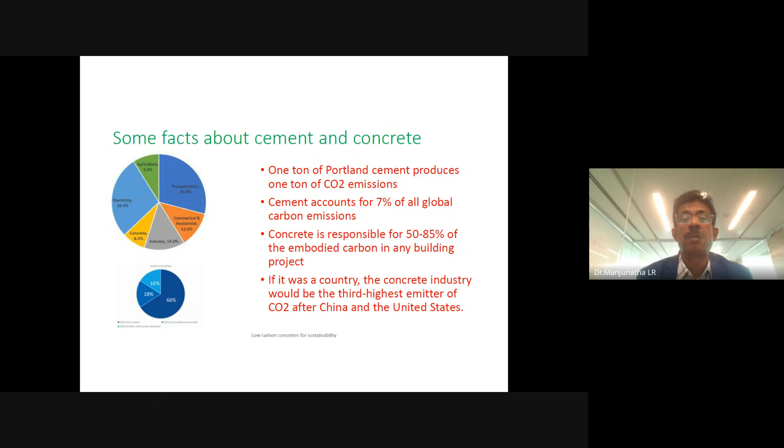There are many ways actually. You can adopt blended cements like slag cement, whose carbon intensity is very low. You can use PPC cement, Portland Pozzolana cement, which is widely available. If you're doing small construction, you should never use OPC cement. If you are using OPC cement in RMC batching plants, you can blend it with fly ash, GGBS, or use high-grade concretes blended with micro-fine materials. These are the various means of reducing the carbon footprint in construction.

So I've already discussed these points. What is low carbon concrete? Earlier, when somebody used fly ash, people used to say, 'oh, you are adding ash to the concrete.' I still remember, when I was at RMC Readymix India, if you mentioned fly ash, they would say, 'what, you are adding ash? We want pure OPC 53 grade cement concrete, we don't want any ash, you are deteriorating the quality of concrete.' That was the kind of questions being asked. But now those concretes are well adopted and accepted throughout the world.

They are called low carbon concrete, but without affecting strength, durability, or performance - in fact with better strength, better durability, better sustainability, and reduced life cycle cost. These are the new terminologies being adopted for low carbon concretes. They are safe, highly durable, and economical in terms of cost benefit. When we look at ESG values, we look at how it is cost effective, how durable, how sustainable, and how you can reduce the life cycle cost. These are the various aspects we look into.

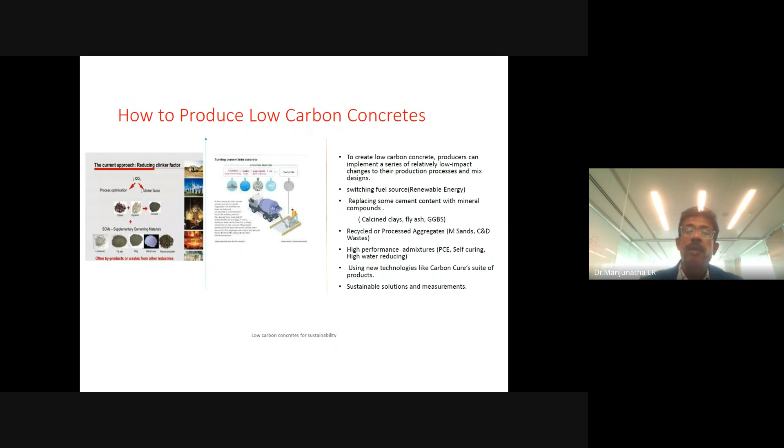Then there are carbon cure technologies by injecting carbon dioxide in the fresh state of concrete. Here you're converting calcium oxide to calcium carbonate, which is a solid material. These are various solutions we are getting in low carbon concrete.

So how is low carbon concrete globally taking shape, and how is it affecting things? Being in Vizag or some other city, you may find that this kind of intensity or measurement of low carbon concretes is not there.

But globally now, go to European countries, America - they will mention the World Trade Center, brought down by terrorists, and a new tower has come near the World Trade Center. There they specified for the business center that you have to design M80 grade concrete, but your cement content should not exceed 230 kgs per cubic meter, whatever you want to do. Those were the specifications for that tower.

So the companies which designed that went for a GGBS fly ash mix along with a microsilica content, where they could get that M80 strength and build the structures. Now those kinds of systematic regulations are coming where the demand is very high, the grade of concrete is very high, but you cannot use higher cement content, because they want to bring down the emissions in the concrete.

So when we make concrete, there are two considerations - one is the supplier consideration, the other is buyer considerations. The concrete companies like RMC or anybody making concrete, they want better pricing and adaptability, and a good supply chain system.

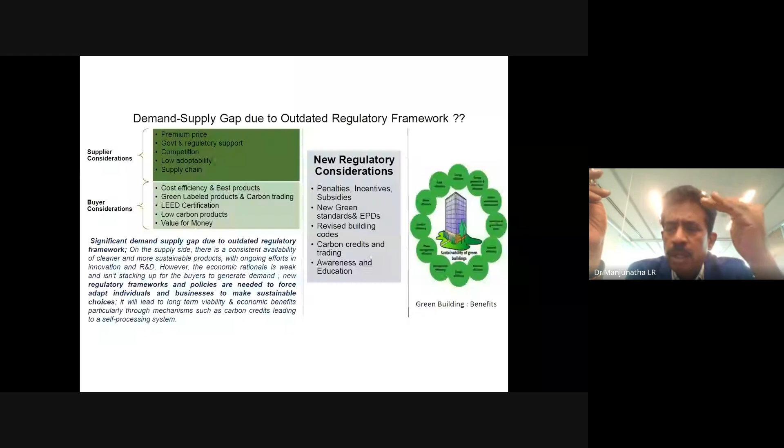These are the various factors. So government is playing a very important role now. Standards are coming, National Building Code is coming, then we have new IS 456, new IS 383, where I'm part of the committee. They're all changing now - IS 383 is now adopting a higher percentage of C&D waste and recycled aggregates usage. All the codes now are allowing the usage of cementitious material.

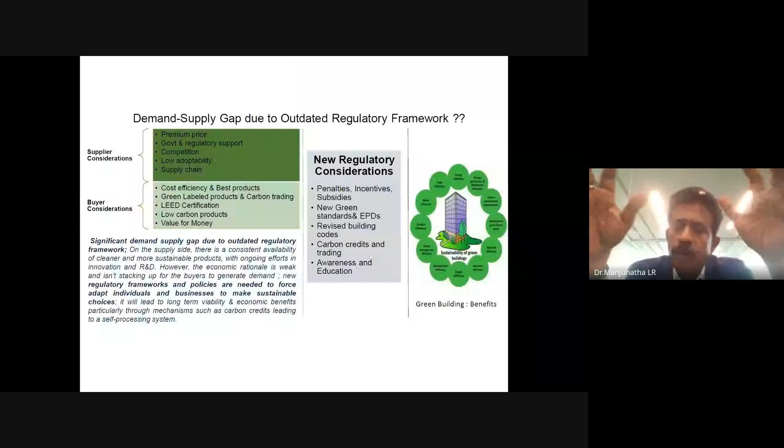New IS 456 is allowing composite cement, blended cements, and other types of cement. Many types of cement which have low carbon intensity are being allowed to be used in concrete making. So we need to work very closely.

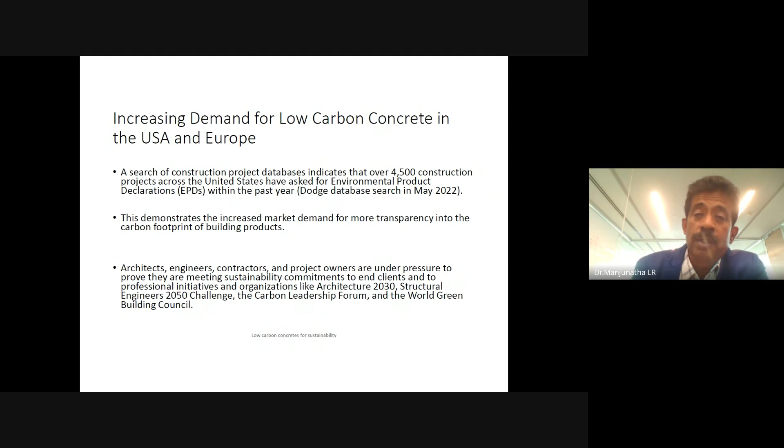So there's an increased demand for low carbon concrete. As I told you, if you are saving 1 ton of carbon dioxide in concrete making in Europe, you are being provided $100, 100 euro as an incentive. That means almost 9,000 rupees is the incentive for you if you go with low carbon concrete.

Coming to JSW Group, we are one of the largest steel producers in the country with huge steel capacity, and our cement company is the fastest growing cement company in India. Currently we have 21.6 million tons capacity, and we are going to reach 40.9 million tons by 2030 - that is our goal for higher growth.

So we have paints - recently we have acquired AkzoNobel India to become the third largest paint company. Then we have infrastructure - we have ports near Paradeep, and we are building a new port in Paradeep.

Then we have ports in Mumbai, Jaigarh, and other places. So our port capacity is also increasing. Sports, we have many sports ventures. We have Delhi Capitals co-owners, Haryana Steelers, Bangalore Football Club, and also through Inspire Institute of Sports, we are supporting the development of new champions for the Olympics. These are the various verticals of JSW Group.

Recently, we have entered into JSW Motors also, where we are the joint partners with MG Motor. We have launched a new vehicle, Windsor, with battery as a service. No other company has that kind of a new system where you don't have to own the battery in the electric vehicle. It's owned by the company.

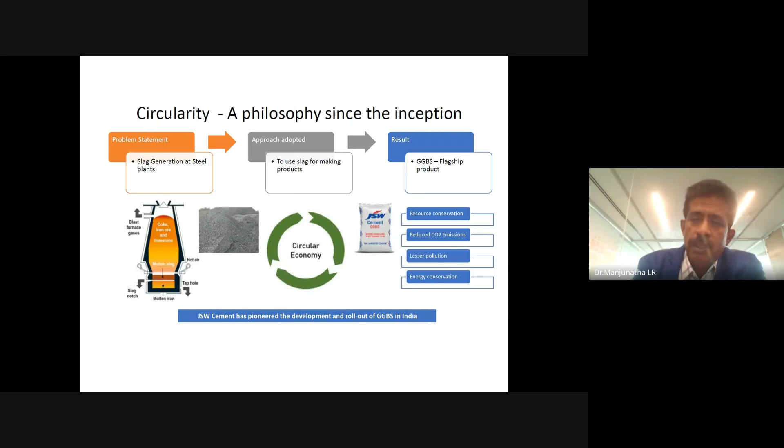So our main mantra is to adopt a philosophy of aligned growth using circularity: reduce the waste, reuse the waste and byproducts, recycle the byproducts, and always think of new innovative ideas, new products. So circularity is our philosophy. As I told you, we are adopting many green initiatives to develop new world-class products using technology, using innovation. Those products are global benchmarks, which can be adopted to develop low carbon concretes in India to make the world green.

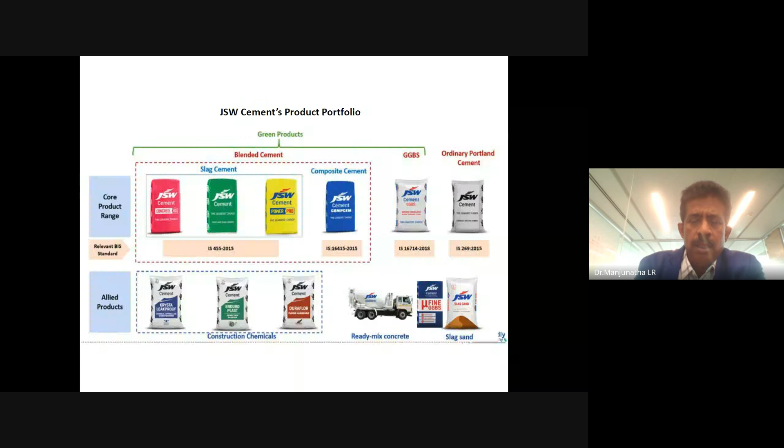This is the product portfolio. You can see, even though we make OPC cement 43 and 53 grade to give all the materials to the customers, 85% of our product portfolio is completely green and sustainable. We are the largest producer of slag cement in the country. We make composite cements, we make blended cements. Also, we make ready-mix concrete, low carbon concrete. And our flagship products are GGBS and microfine GGBS. Both are adopted almost everywhere in India.

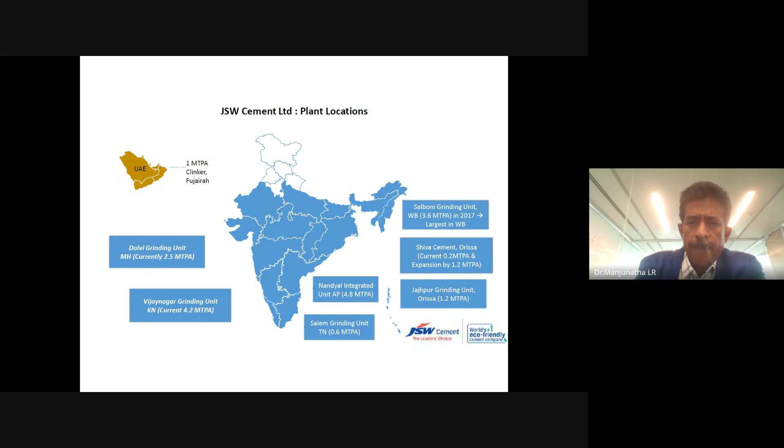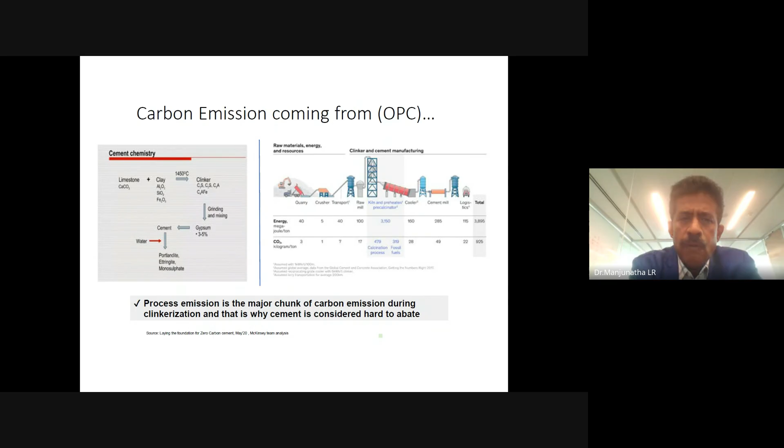So carbon emissions, as I explained earlier, to make 1 ton of clinker, there are almost 925 kg of CO2 emissions. Energy consumption of close to 3,895 megajoules per ton. This is the energy requirement because the limestone goes through a process. First, we bring the limestone, we mix other additives, clay, alumina, silica, iron oxide, and have a raw meal, grind it, heat it up to 1450 degrees centigrade with preheaters through the kiln. Then we get clinker, grind the clinker, add gypsum, and we make cement. So that's how the cement cycle works.

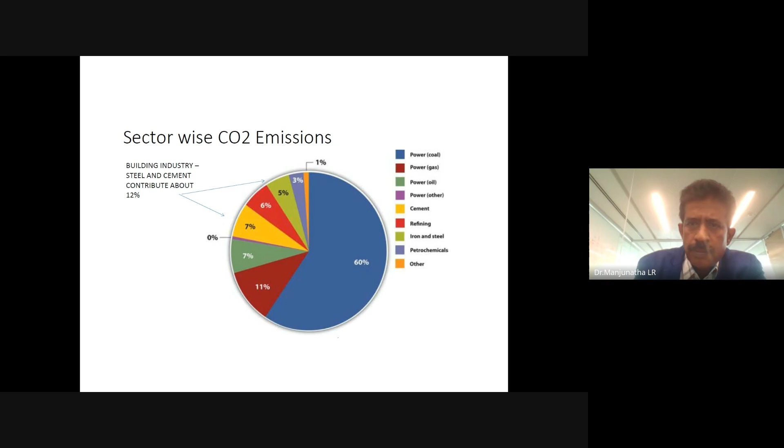So coming to the construction industry, as I told you, the energy consumption from building construction, operation and maintenance is about 40%. So once we construct the building, it's not over. We have to maintain, operate, AC systems are required. And many buildings and campuses now have various maintenance systems, HVAC, everything is required. So emissions are about 30%, and global dust. Construction not only leads to emissions but also dust, the particulates, PM 2.5, PM 10. These are all worst disasters.

When winter time comes, we always struggle. The air quality index in many cities has now deteriorated completely. Almost 150 to 200 air quality index is coming. Because of that, people are not able to breathe properly. These are the various aspects during the winter season. So we need to really think why it is happening like this. A city like Delhi closes schools for almost 10-15 days because the air quality index is poor.

And we need development, we need growth. India is one of the fastest growing economies in the world; we're going to be the third highest economy very soon, overtaking Germany or Japan. When it happens, we need development, we need growth, but at the same time, we have to keep our environmental conditions safe so that our next generation will be very comfortable living on this planet.

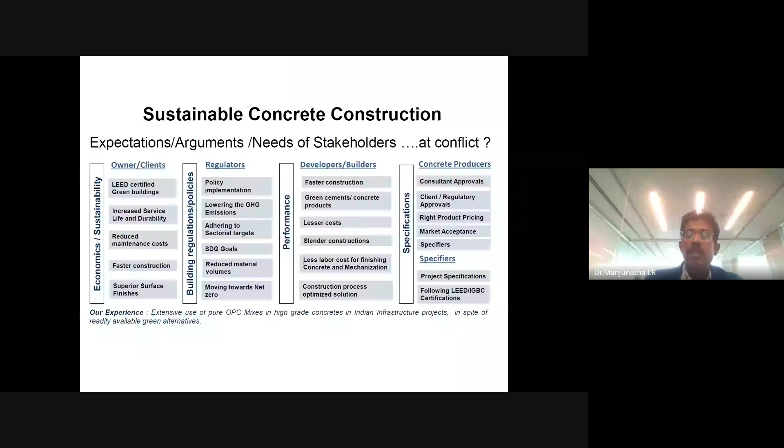So concrete producers, RMC companies, they want the approvals of the client, right product pricing, because they should be sustainable. They should be able to provide a good quality product at the right price. And market acceptance is also very important. Then there are structural consultants and professors. Many projects may be coming to your college for approvals on mix design and other things. So you also evaluate based on the specific requirement of the client.

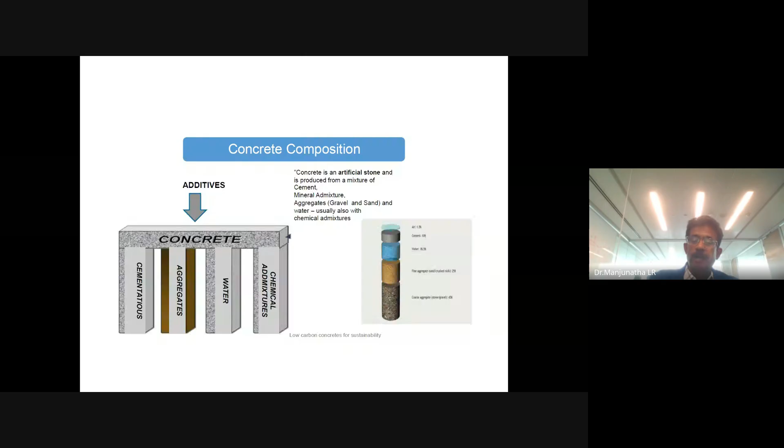So coming to the concrete composition, as I told you earlier, concrete was a mixture of only 4 to 5 ingredients. Mainly it was cement, aggregate, water, admixtures. But now the concrete philosophy is changing, as I told you. In the new IS 456 draft code, on the exposure condition itself, they have now got various classes. To understand, to educate the people is very important. So we need to really work on how we can take it forward.

So it clearly says that the adoption of sustainable SCMs like fly ash, GGBS, slag cement, PPC is always there in the code, and you can adopt them very comfortably. Many clients or other people will keep on telling, no, I want only pure OPC cement concrete, I don't want any blending. But we have to teach them. We have to make them listen. See, we are giving you the same quality, better performance, better durability, at a bit reduced cost. So why should you not accept this new type of concrete with a blended cement or an SCM instead of going for a pure OPC concrete?

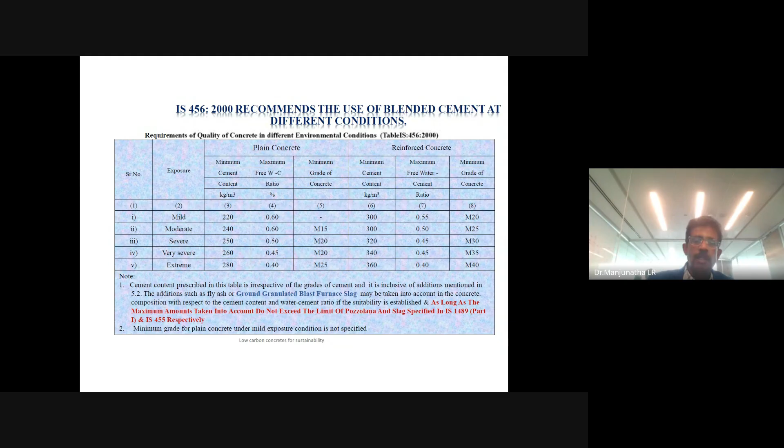So when you are becoming a designer or a consultant, or you want to teach the students, you have to basically make them understand what is important, what is the need of the hour for the country, for the concrete technology. That's very important. And we need to provide proper solutions and make them realize. It may be one call, two calls, three calls, whatever the number of calls, we can convert them.

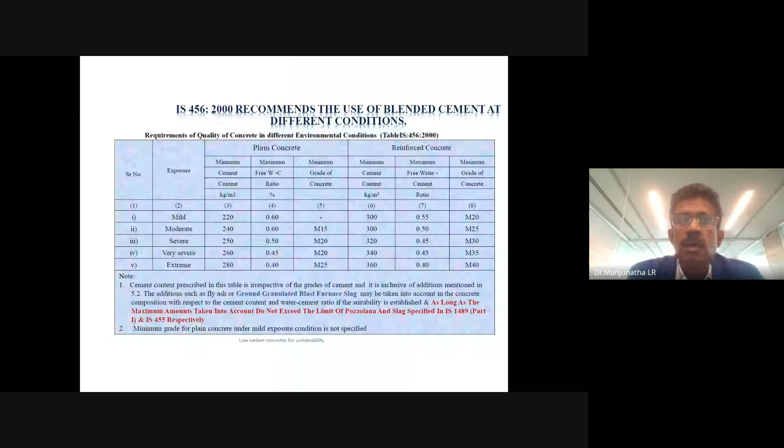So meanwhile, durability parameters are coming, sulfate and chloride resistance based on the environmental conditions. We need to really work very closely on what kind of cement and what kind of blended mix of OPC, GGBS or fly ash will be effective based on the sulfate resistance and chloride resistance.

So as I told you, we want so many things from concrete. Even though concrete is thought of as an inert material, it's not an inert material. It is a very active material. It will keep on hydrating even after 1 year if you are using a mineral admixture like GGBS or fly ash. So when we make concrete, at the initial workable stage, it should be highly workable. That means it should be able to flow freely and should not segregate and bleed.

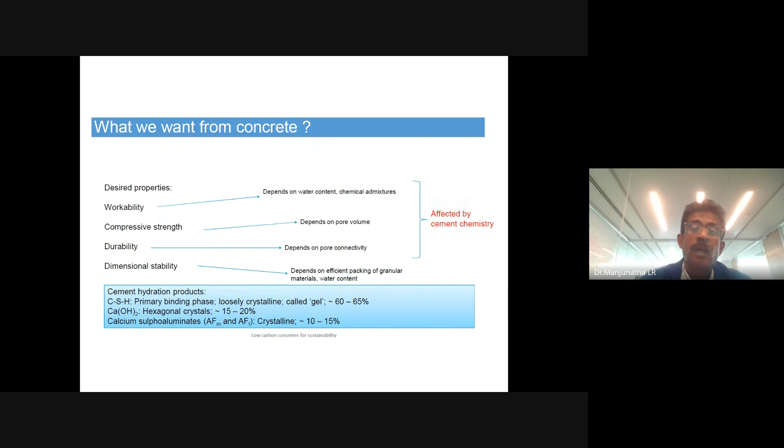Okay. So workability is very important. Compressive strength is important. Durability and dimensional stability are important. We're looking for dimensional stability and durability. These are all very important for a concrete structure.

Sorry. So, challenges in fresh concrete. When we make concrete, we are going to get a lot of challenges. Whoever is making concrete, definitely we are going to get many challenges. Challenges in the form of, mainly, concrete workability, which is very important, and shrinkage cracks, plastic shrinkage cracks. So we need to avoid all these things.

So ideally we need perfect particle packing, but in practice we get excess water, bleeding, compaction issues. If you're not getting it from a good quality ready mix batching plant, if you're making concrete at site, whatever the case, it will be affected.

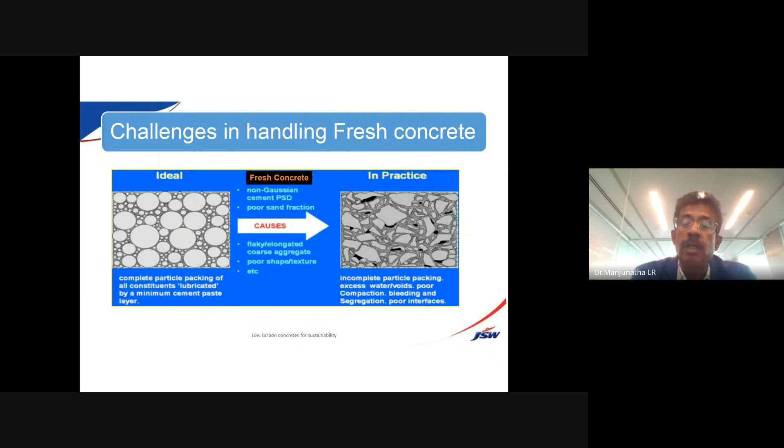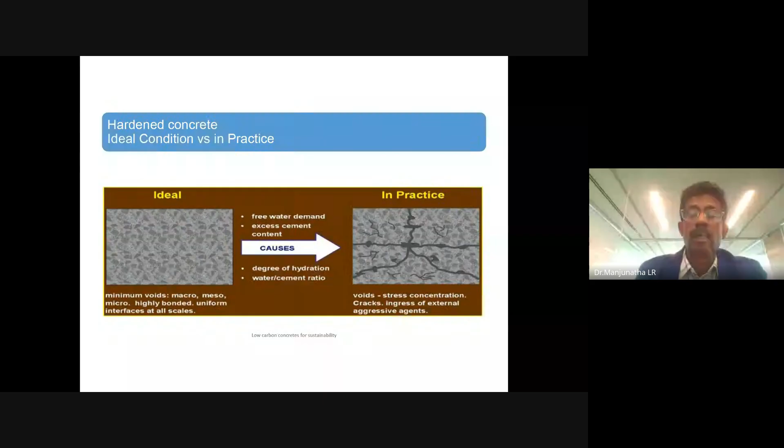It will be affected a little bit. So we need to really work the fresh state of concrete. So when the concrete is hardened, okay, concrete is set, we are looking for a reduction in the shrinkage cracks. Ingress of external aggressive agents, voids is very important. So we need to really work very closely with making concrete. Free water demand, excess cement content. So when we are designing mixes, how to regulate the water content, and also the degree of hydration, water cement ratio, these are all playing a very important role.

So as I told you, the enemies of concrete are many. If you're not able to make good quality concrete properly, then you're going to have various enemies. Enemies in the sense like the various agents which are going to attack the concrete. So we have mainly moisture, concrete exposed to moisture. When the structure is made, definitely there's rainfall, there's wind, the moisture will enter the concrete. Then we have sulfates entering the concrete body from soil. Then chlorides through soil will enter the concrete. Then carbon dioxide. The vehicle population is increasing in every city. The carbon dioxide emissions by the vehicles will also enter the concrete.

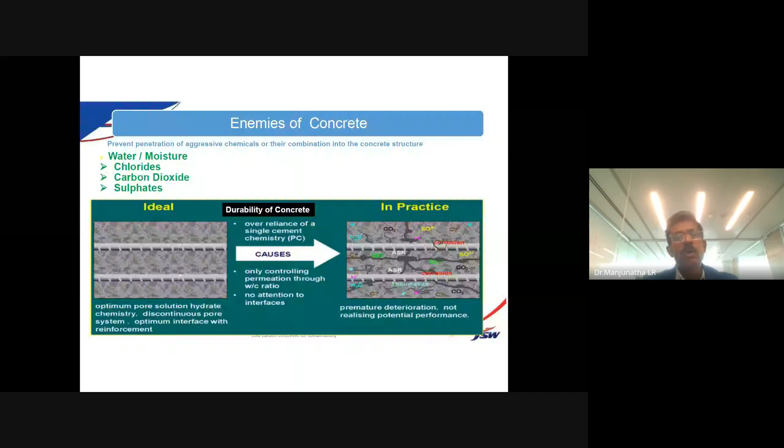So with all that, when the aggregates are very reactive with alkali silica reactions, then ASR is very important. It's going to play a very important role. Then you need to really design the concrete. So concrete is now no longer just like 1:2:4 or 1:1.5:3 to make concrete. That is not going to work. The concrete which is going to work is properly designed. We have a proper mix design. Everything has to be perfect. Then only that kind of concrete can work for any kind of situation.

So concrete durability, as I told you, concrete has to be durable. Because when we make any building structure, we are looking for the building to last as much as possible, and we are not demolishing the building. We want it to last generations. Unless somebody comes and the floor area, FSI, is changing and higher floors are permitted, nobody would like to demolish the building or go for a redevelopment. In Mumbai, about 40,000 apartments are under redevelopment.

Because in Mumbai, the coastal area, like Vizag, the buildings are subjected to various weather conditions. Rainfall, heavy rainfall, then sulfate and chloride attack. All these are quite common. And the building comes for redevelopment. Now there are 40,000 apartments going for redevelopment in Mumbai. So this is very important. So how can we design the buildings?

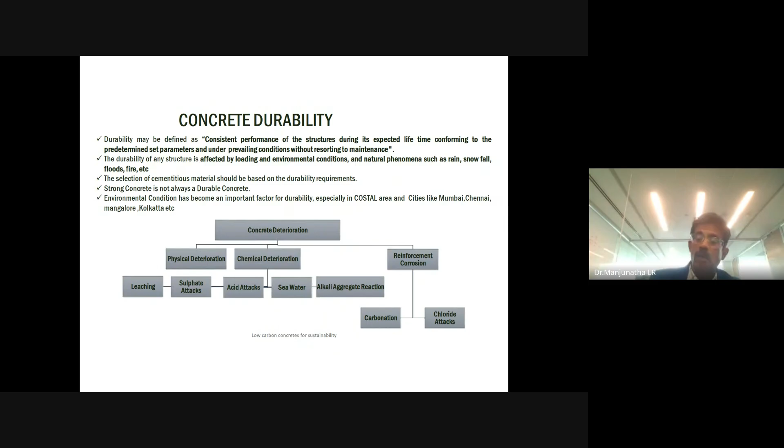So the concrete should be able to withstand both physical deterioration, attack on the physics of the concrete by external agencies, and chemical attack, where the corrosion of reinforcement will take place. So we need to really work very closely from the design aspect, how we can make the concrete highly durable for both physical deterioration as well as chemical deterioration.

So microsilica is quite popular. It comes imported from many countries like China, and it comes from Norway and other countries outside. We don't make microsilica here. So we generally make GGBS and fly ash here. So these are very important products.

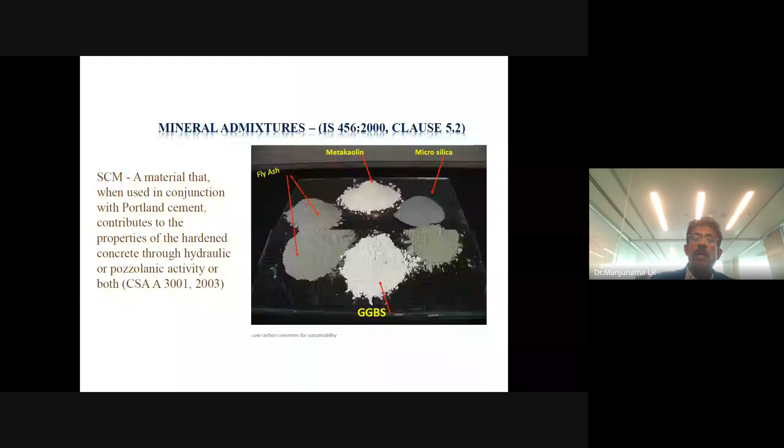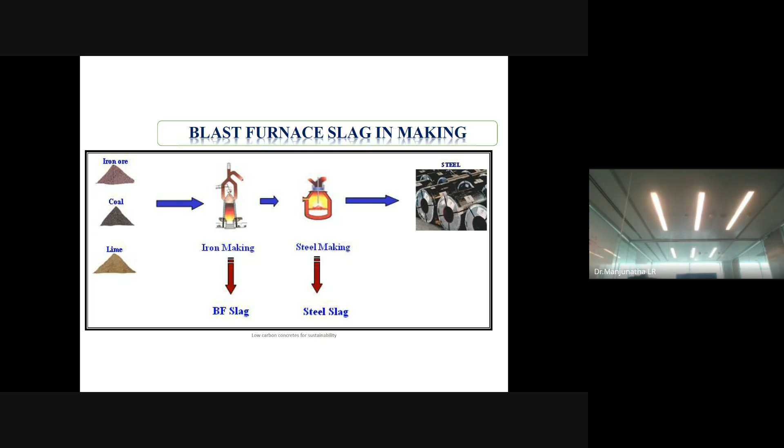Just let me have some water, 1 second. Sorry. Okay.

So slag, basically slag, you all know, you have a steel plant in Vizag, blast furnace slag. How is it manufactured? It comes from the blast furnace. We have iron ore, coal, lime, all coming as a feed into the blast furnace. Here it is heated up to 1500 degrees centigrade. Then we get high quality iron. Then almost 30% we get as slag.

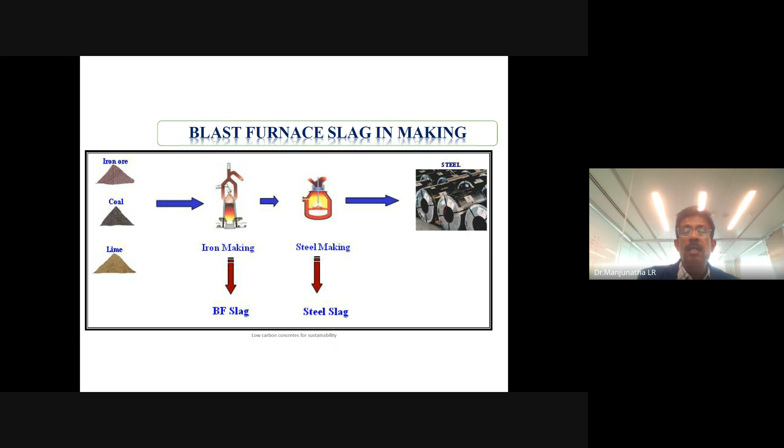It's called blast furnace slag. Blast furnace slag is rich in calcium silica aluminates. So it has a very good product mix. Calcium oxide is there, silica is there, alumina is there. So that's the reason it is very good as a cementitious material.

So once the blast furnace slag is taken out and quenched into small granules, that granule, after removing moisture, then we have a grinding, vertical shaft grinding mill or a ball mill. You grind it into fine powder. That's called GGBS, ground granulated blast furnace slag.

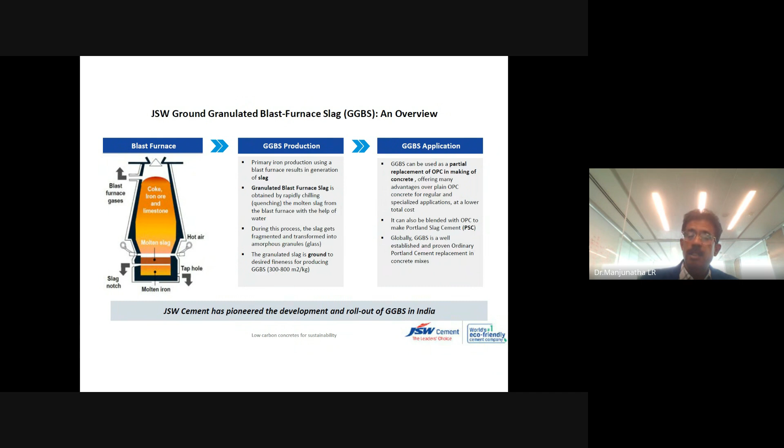That can be blended along with OPC cement to make slag cement, and otherwise also that GGBS can be sold as a separate product. IS 16714 gives the permission to be sold, and we have been selling this product, close to 6 to 7 million tons every year, to many RMC plants, where they blend the GGBS along with the OPC cement. They make the concrete, starting from 25 to 50, 60%, they have been using continuously. So this is the GGBS. And we are the pioneers.

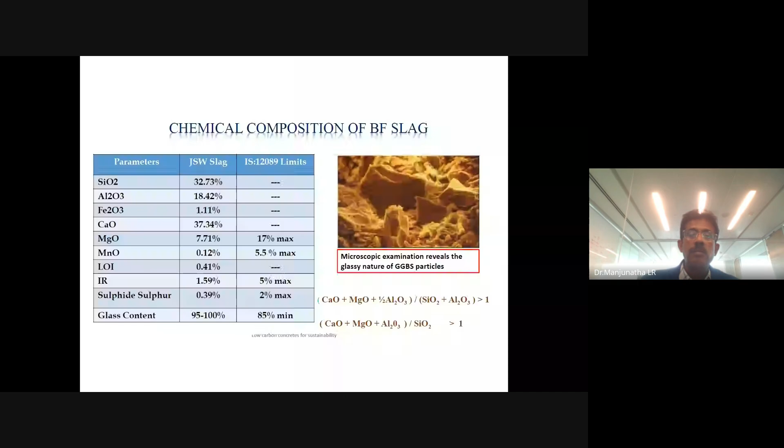So as I told you, the slag, because of the advantage of calcium, silica, alumina present in very good quantity, it's a cementitious material. Apart from that, it's amorphous in nature. Glass content, we're talking amorphous reactivity index. So the slag we are manufacturing has almost 95% glass content. So it makes the slag super reactive when you add it with water, along with the cement combination. So this is the GGBS. You may already be knowing, in Vizag, GGBS is being used extensively in all the RMC batching plants.

So why GGBS is important is that, as I told you, when you are making cement, your emissions are very high. So almost 850 to 950 kg emissions are there in every ton of cement you are making. Whereas the GGBS has already suffered this emission in the steel manufacturing process, only the grinding remains. It was a waste material being dumped at the site. So that material we are taking and grinding into fine powder. So the emissions are close to 60 kg per ton. So if you are using GGBS by almost 50%, you are reducing the CO2 emissions very effectively by almost 50%.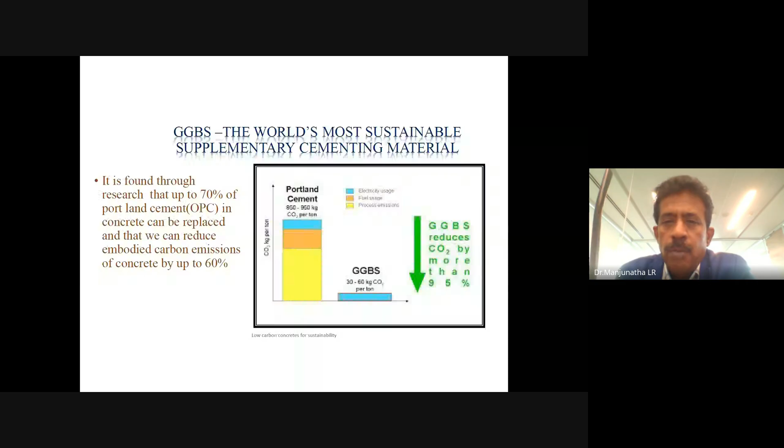So not only is it reactive, it is double reactive. The reason behind it: when you add water to OPC 43/53 grade, you will get two components. One is the CSH gel formation and also the calcium hydroxide. So calcium hydroxide is about 26% present in the concrete body. Then about 50-55% we get CSH gel. And the balance is the voids and ettringite. So what we have to do now is convert this calcium hydroxide into a more useful product called CSH gel. More the CSH gel, more the particle packing will happen in the concrete.

So the advantage is that when we add GGBS in the concrete matrix, GGBS has three components: alumina, silica, and calcium oxide. Calcium oxide directly contributes as a cementitious material in enhancing the CSH gel. Then alumina and silica, a pozzolanic material, work with calcium hydroxide and convert it further to CSH gel. So hence, we have a robust concrete structure which is highly durable. Increased durability, increased long-term strength, and also better particle packing. These are the various new points you are going to get by adding GGBS in the concrete.

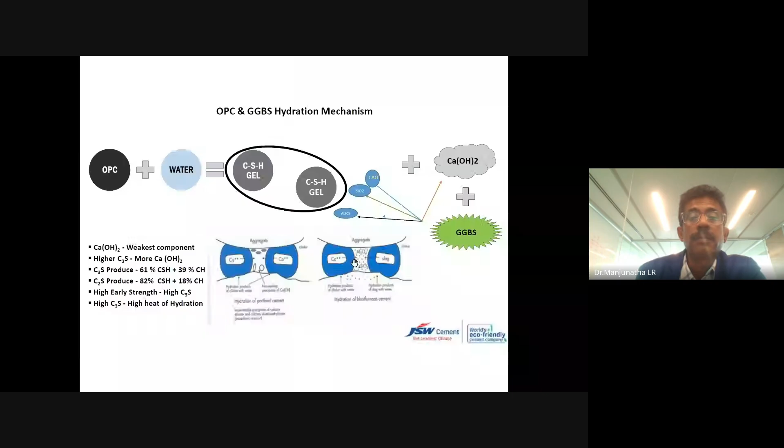So advantages are many. We have GGBS as a product resistant to sulfates and chlorides, with reduced heat of hydration, especially for raft foundations. You're designing a building, 2.5 meter raft, 3 meter, 4 meter raft. So you are going to have a very good concrete with a temperature gradient less than 20 degrees centigrade, because temperature gradient is very important when you are designing a raft foundation. So GGBS plays a very important role.

Like now, recently the Amaravati capital of Andhra Pradesh is being built. So we had supplied GGBS blended concrete for the HOD towers. There, the concrete was submerged in water for almost 5 years. The government changed and the capital development did not happen. So, I'm giving a live example of your Andhra Pradesh only. After 5 years, IIT was appointed to study the concrete durability, whether the same foundation can be used, because it was submerged in water.

Then they completely studied it, and there was one foundation which was 60% GGBS. So they studied and gave a report that nothing has happened to the concrete because of the usage of GGBS in the concrete. The same foundation can be used, and the structures can be built 33 story. So imagine we had to remove the entire foundation and redo it. Not only cost, removing itself would have been much more difficult, almost a 5 meter raft. So using GGBS in the AP Amaravati capital long ago has really helped them now. And on the same structure, they are rebuilding the towers, and that will be the capital at Amaravati.

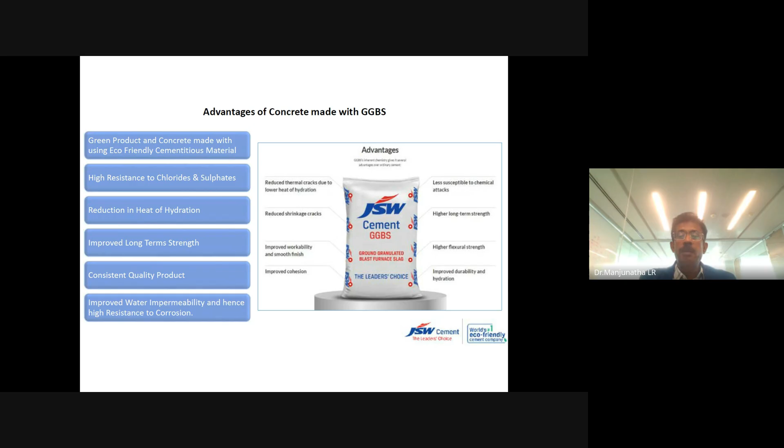I'm giving a live example. This is a case study; you can always ponder how it is important. Apart from that, we make slag cement also. It's a very good product, especially for plastering applications, masonry applications, and even concrete also. If you're using site mix concrete, it's highly useful.

So the advantages of GGBS over fly ash are many. It has a very good advantage because in fly ash, as I told you, the amorphous content is very less. Even though we have silicon dioxide, SiO2, more than 50-55%, the reactive component in that is only about 25%. That is the thing.

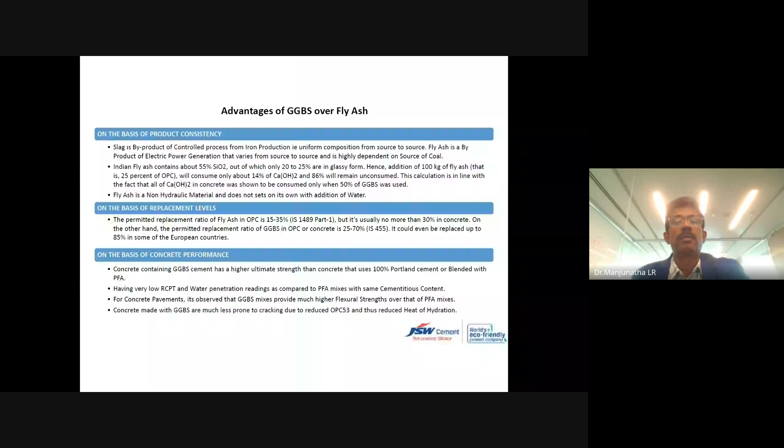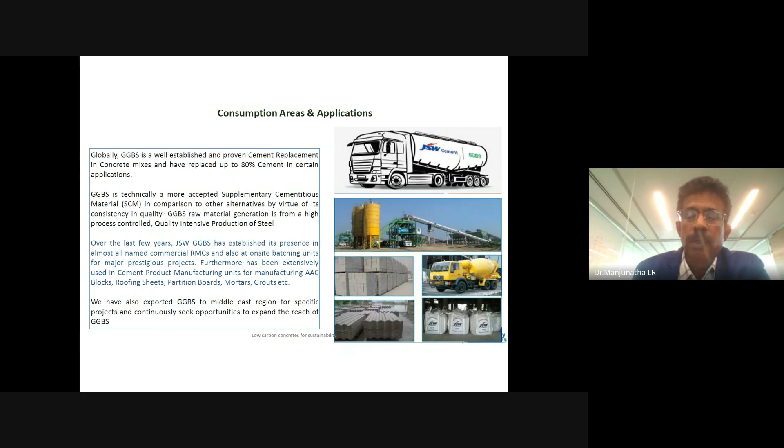Apart from that, to develop low carbon concretes, we can use it for block manufacturing. We can use it for sheet manufacturing. It is not that only in concrete you have to use low carbon materials. You can use it for other supplementary materials also, like tile adhesives. There also we can use it, AAC blocks, concrete blocks, and other things.

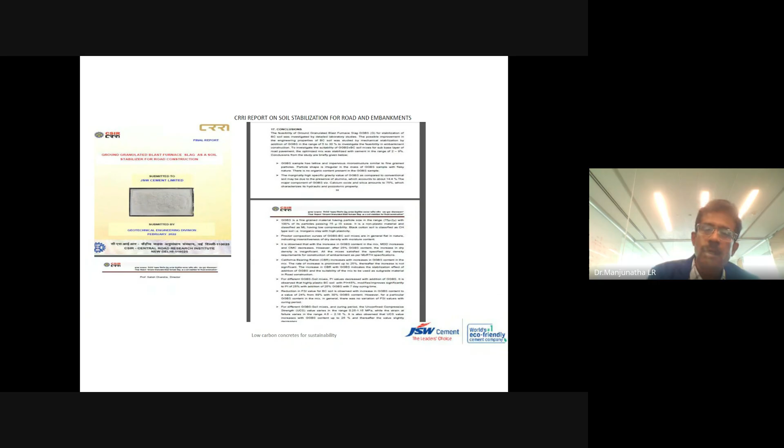So we have got many codal approvals now. Even for soil stabilization, the slag has been very useful. Up to 15% we can use for soil stabilization, backfilling and all; blend it and compact it. You will get the results.

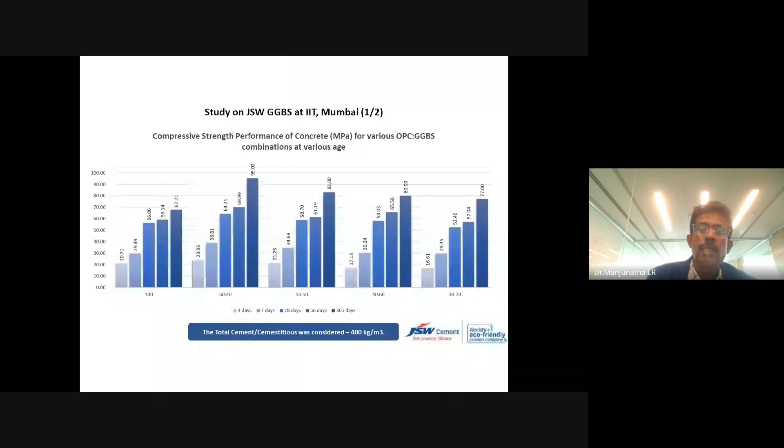We have done various studies. At IIT Bombay, we have done a study for almost 1 year on M40 grade concrete. We have measured the strength gain over 3 days, 7 days, 28 days, 56 days, and 365 days. We have got excellent results. You can see that the results are very good, phenomenal.

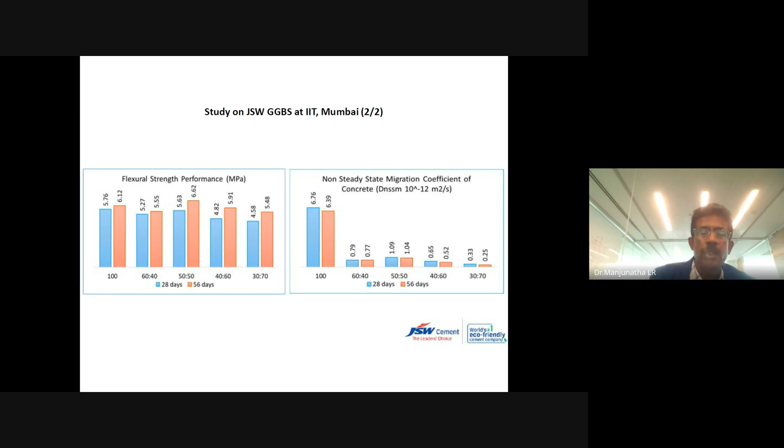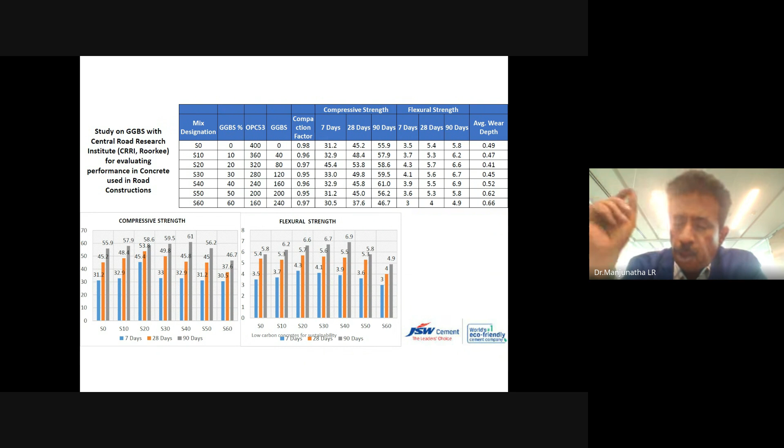We have many major specifications. So I'm not telling anything just orally. All these products have got specifications in major departments where we can adopt these products. Not only because of cost effectiveness, but also because of high performance, high durability, high strength. These are all the hallmarks of cements as well as SCMs. These are many major projects where they are already adopted and being used.

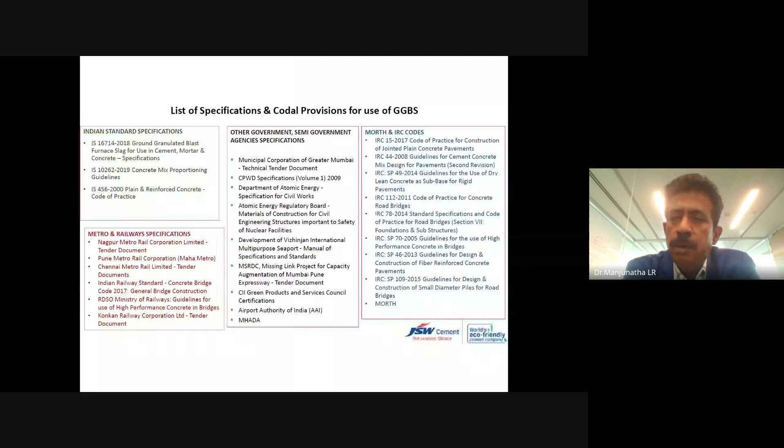The list of specifications and various codes is mentioned, which codes refer to the various specifications. We have mentioned everything here: IRC and other specifications. You can go through that and refer to it. And we have made environmental product declarations, EPD, for whatever products we are manufacturing.

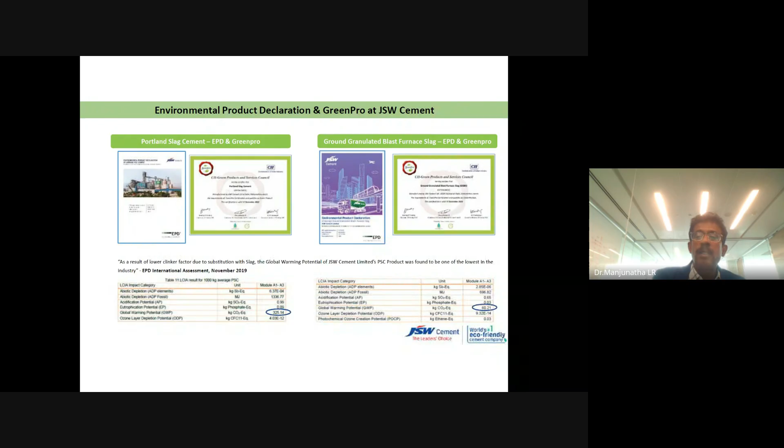Now, EPD is a globally accepted standard. If you go to any European country, they make it mandatory that you should have an EPD certificate for your product. That means how much carbon dioxide per ton you are emitting. This may vary plant to plant, location to location, but they want it. Only then do they put a benchmark: okay, you are making cement, your carbon intensity should not increase so much, otherwise we will not buy from you.

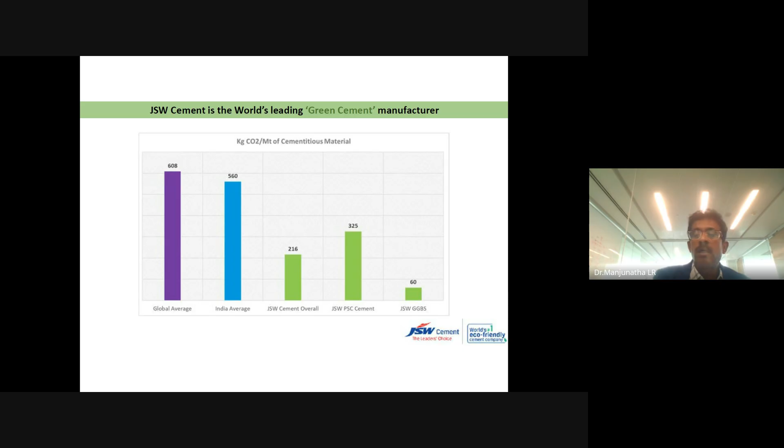So the world leading cement manufacturing company, JSW, has become the lowest carbon footprint company compared to any other company in India or abroad. This is the next best example, and I've just done a calculation of how much emissions are coming down.

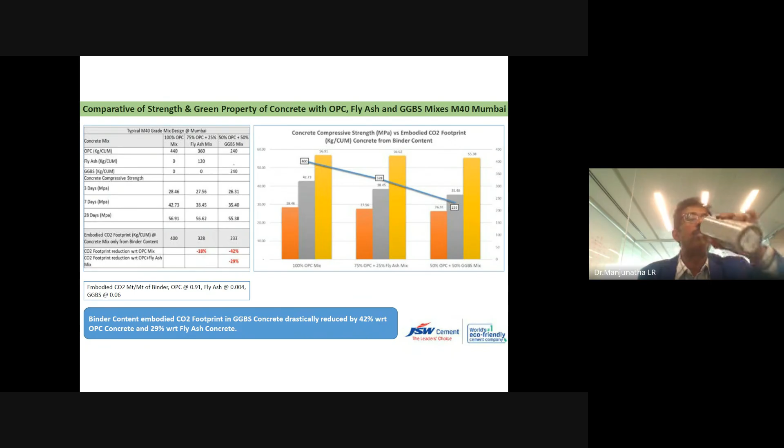We have a 100% OPC mix, a 25% fly ash and 75% OPC mix, and a 50% OPC and 50% GGBS mix. In this M40 grade concrete, with the fly ash mix the CO2 emissions have reduced by 18%, whereas with the GGBS mix emissions have been reduced by 42%. That is the beauty. The difference between the fly ash blended and GGBS blended is almost 29%. Similarly, in various applications like ground slab and early strength, we can use up to 35%.

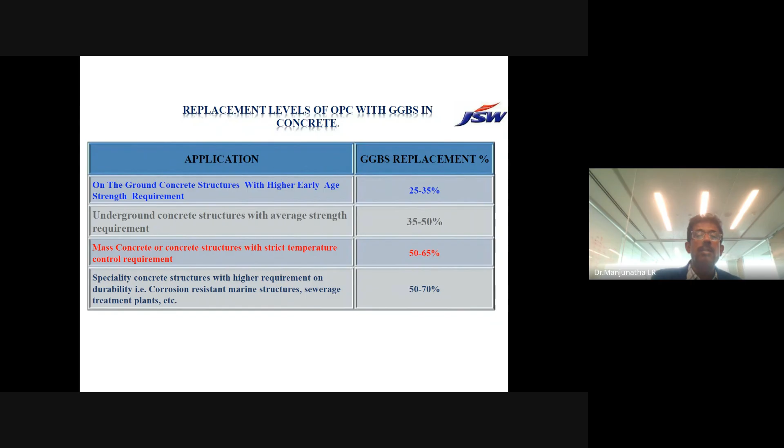For underground concrete structures with average strength requirement, we can use 50%. For mass concreting application, we can use 50 to 65%.

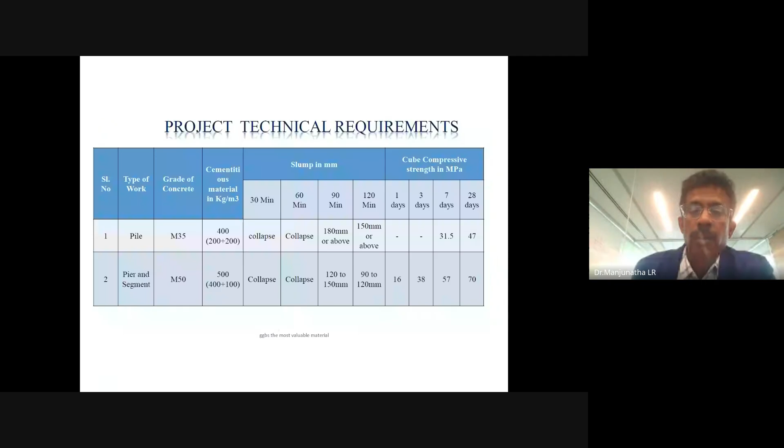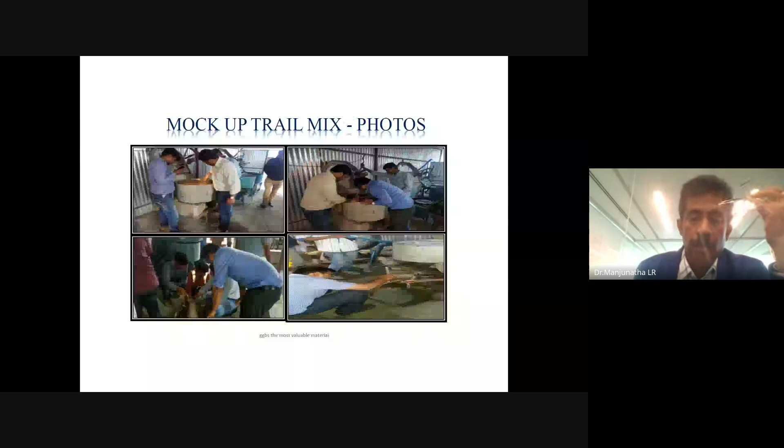Many case studies are there, like Bangalore Metro, where we completely did a study for M35 and M50 grade concrete. Any company that wants to adopt any system wants a joint trial. The admixture company, cement company, chemical company, we did and proved to everybody that this product will work with all the cements, all the admixtures, so that you can adopt it.

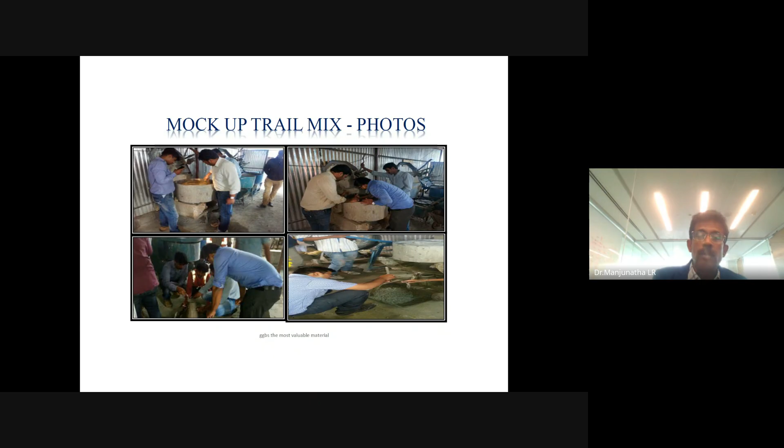These are the various elements of the elevated corridor. You can see many structures.

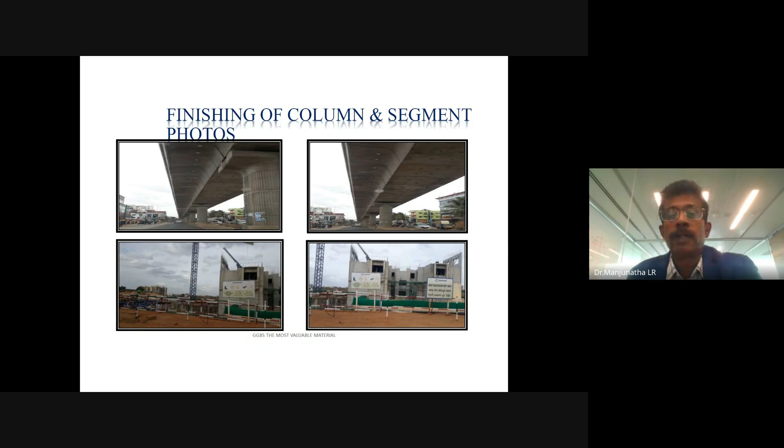So we studied this at one RMC plant, Ready Mix India, where we have done a replacement almost for M20 grade concrete at 60%.

You can see the OPC 120 kg, GGBS 180 kg. After 28 days only, you have got a better strength. At 56 days also it's increased. At 90 days also it's increased.

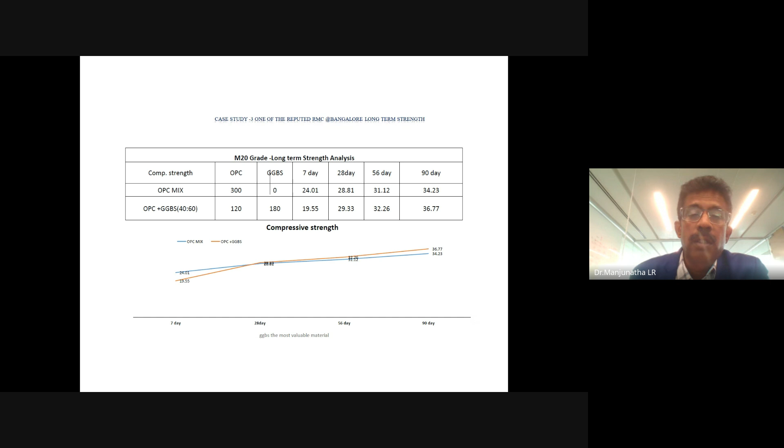This means that usage of mineral admixtures not only maintains the quality and strength of concrete, it also achieves sustainability and durability.

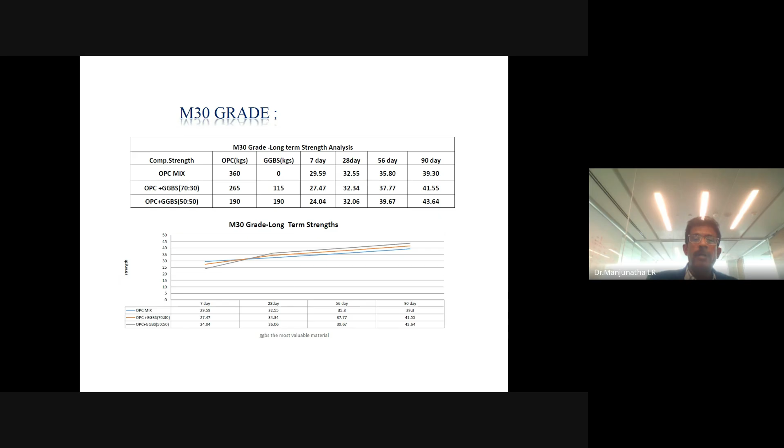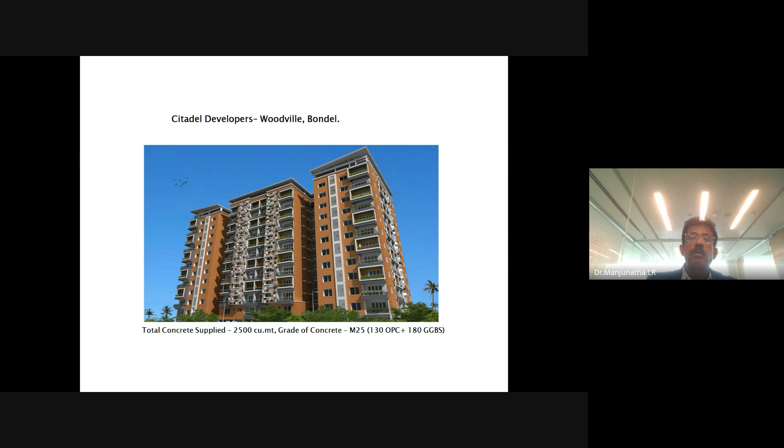Some living examples of the projects - Mangalore. Some of the photos all over India we have done. So I have Mangalore photos. This is Citadel, Mangalore.

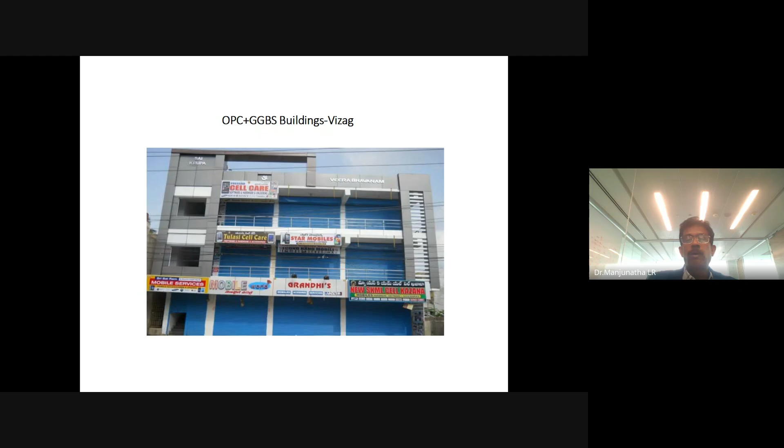Mangalore is a similar city to Vizag, coastal and similar culture almost. So this is a Vizag building, when I was coming here I had taken this photograph also, long back - still it is there, luckily. Vizag photo is there, GGBS usage.

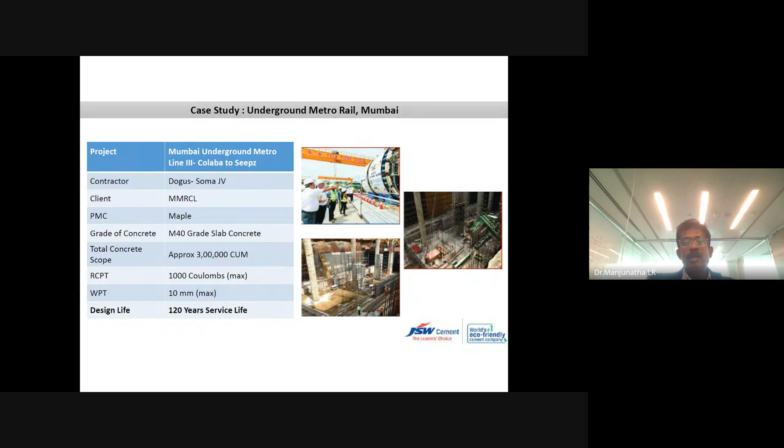And Mumbai Underground Metro Station - there the GGBS usage is 46%. In Bangalore International Airport, here also 40% of PQC concrete work.

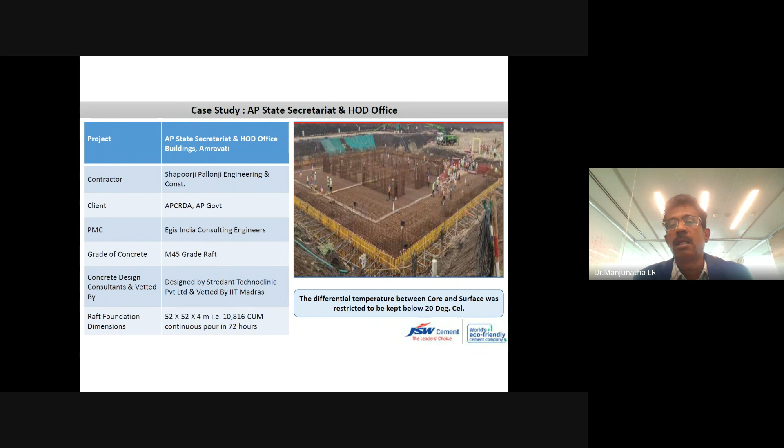I was talking about this project, the AP capital region, Amravati. They used 60% GGBS. As I told you, the re-inspection was done to carry out the work. The new government assumed office and started working on the capital region. So definitely, you can see the foundation was very strong.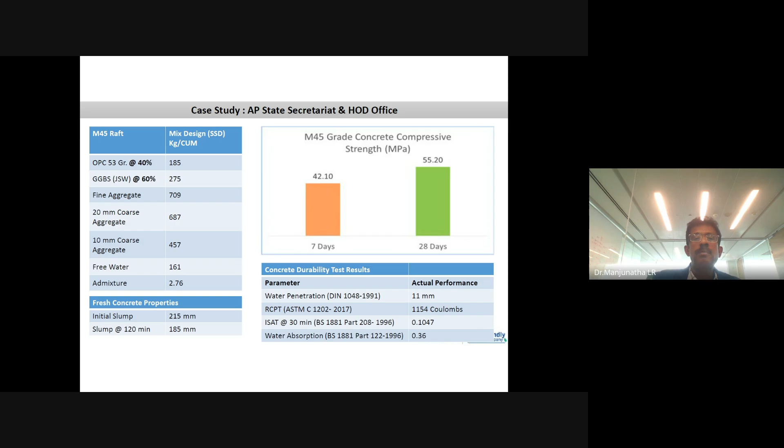Once again, Trans-Harbour Link Project, MTHL. Then we have Karwar Seabird Project. Here also L&T initially started with 25% GGBS. They made it 50% and 60%. So they got the confidence.

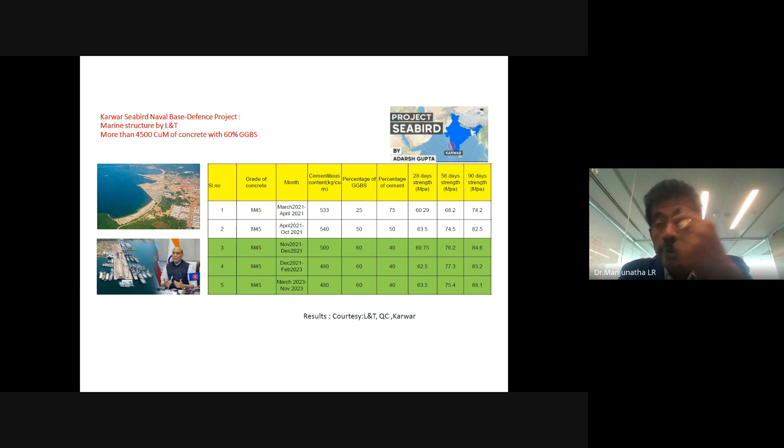Any product to be adopted, you need to have the confidence that it will work. So start with a lower percentage and keep on increasing and keep on doing it. That will help you.

Once again, other projects like Amar Pristine project - many examples are there. I'm giving you how it is helping actually. So not only one project, there are hundreds of projects here in India where they have been using this continuously.

So microfine GGBS is a new product. This is ultrafine. You may be knowing similar products like microsilica or alcofine. This product performs better than those products.

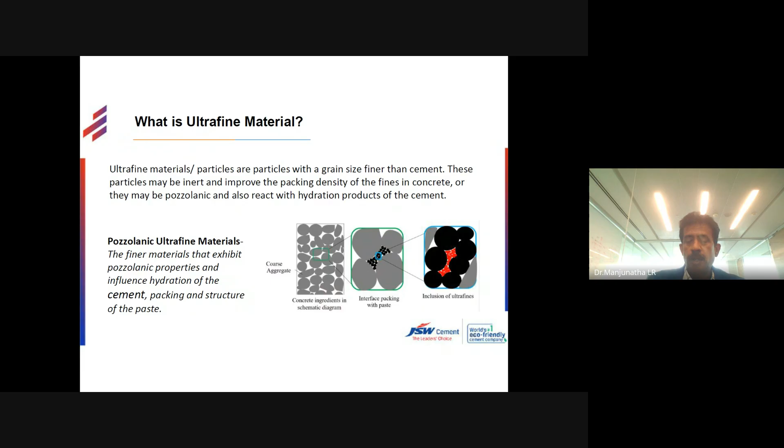Why ultrafine? Because you need higher particle packing when you go for high grade concrete, because you need to attain strength quickly. The moment you add higher particle fineness, you get quick strength.

So these are all ultrafine materials like microsilica, ultrafine GGBS, ultrafine fly ash, metakaolin. Availability is very important. Ultrafine GGBS is available in many parts of South India, Western India, North India, because companies are manufacturing now, and the potential and quantity is going up.

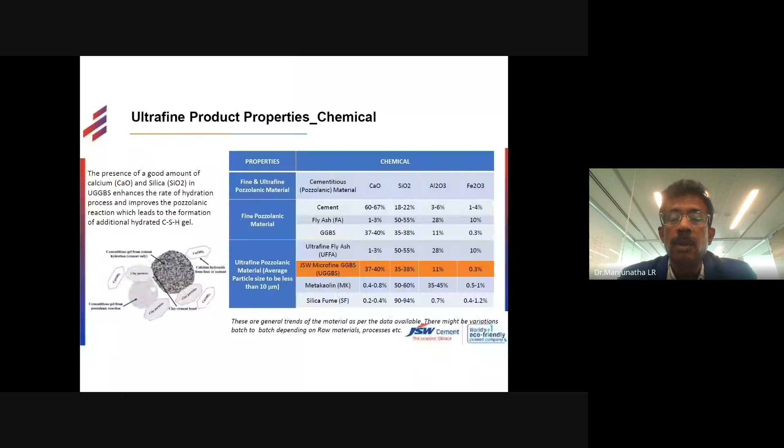The advantage of ultrafine material is that ultrafine GGBS or microfine GGBS gives better performance because the particle size is below 10 micron, so it's a very reactive component.

Product overview - how the ultrafine microfine GGBS is manufactured. Similar to when we get GGBS, we separate out material and have a separate crushing unit, and you get continuous uniform structures, uniform products from that process, so you get very good quality ultrafine GGBS.

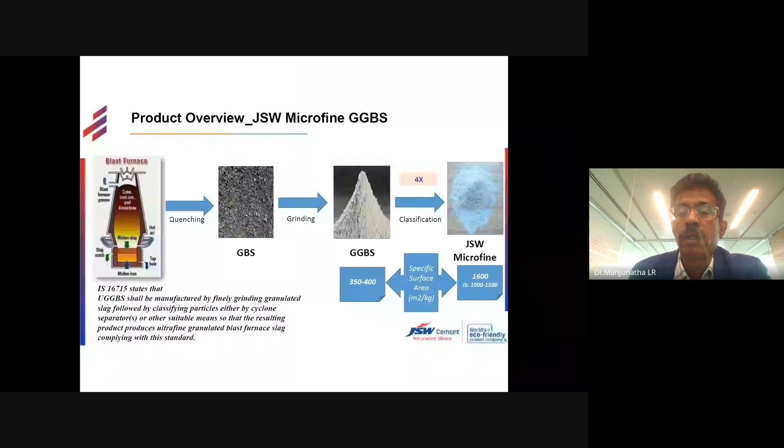We have got the BIS certificate. The advantages of ultrafine GGBS or microfine GGBS are many, especially quick strength and early strength required for high grade concrete. High performance because it's a slag-based product, so reduced carbon footprint, and durability is enhanced.

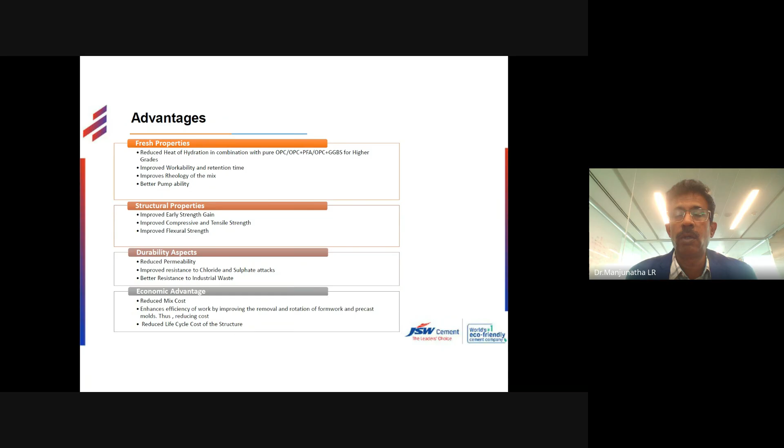Applications of JSW microfines are many - raft foundation, mass concreting, grouts, geopolymer concrete, marine structures, high density. For all these applications, if you're doing any R&D work, you can try out using this product.

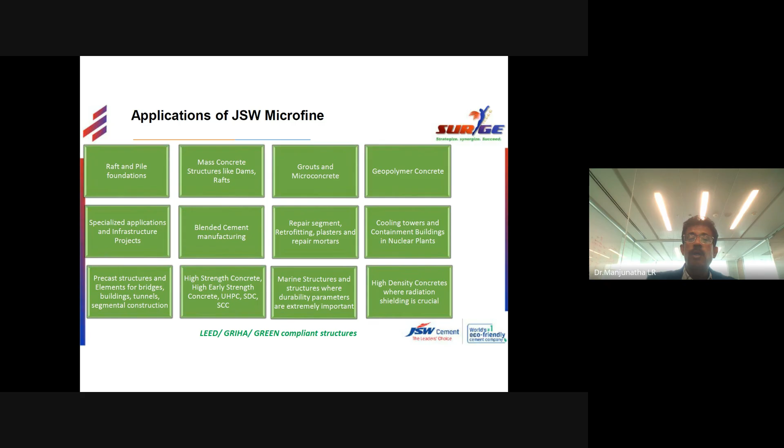Very important - JSW microfine has been used in many projects actually. Compared to microsilica, ultrafine GGBS is better. The microfine GGBS is better, as shown by research work by IIT, because the particle packing is very good.

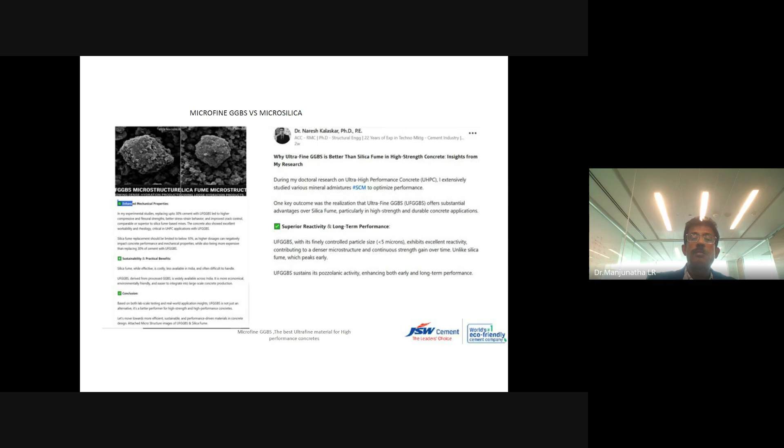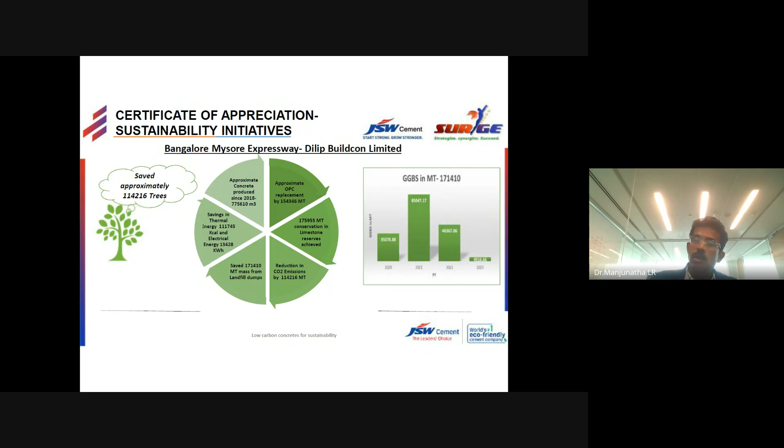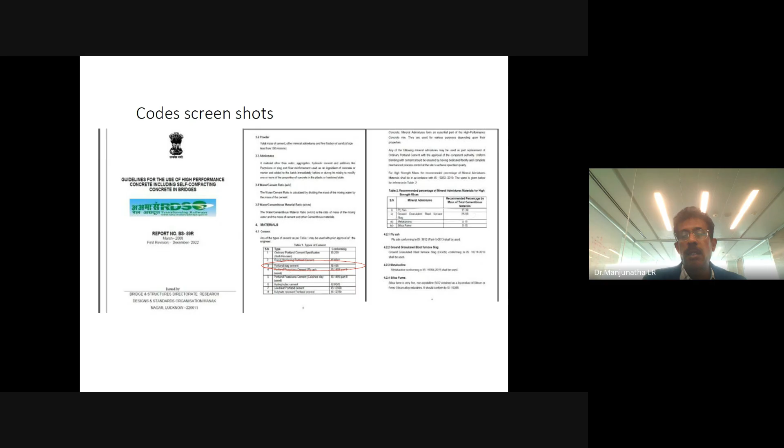Some of the appreciation letters, many projects we have been doing. So this is the IRC code, RDSO, railways. There also they have mentioned the usage of GGBS up to 50%.

So what I'm going to tell you is that now adoption of low carbon concrete is a must for everybody. It's very important to use blended cements. If you are buying concrete from an RMC plant, you should ask him, are you using GGBS, are you using fly ash, how much percentage you have been using. You have to look into all these aspects when you want to buy concrete or order concrete for customers.

So, sustainability initiatives by Indian developers. Green buildings are going to come. India is the fastest adopting country in terms of green buildings compared to any other country. It stands second only to America.

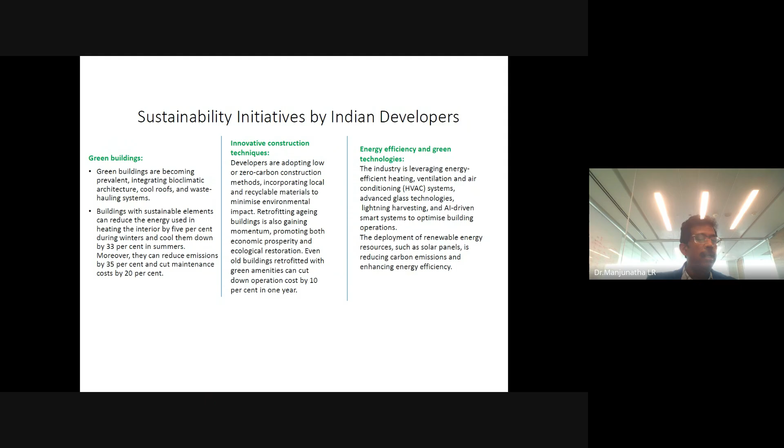So I would like to conclude my presentation. It's very important for professors to adopt green solutions, not only at their construction sites, but also to advise students and faculty and other members that they should adopt green technology, sustainable materials, and always innovate. Innovation is very important. Through innovation only we can bring in new technology and make India self-reliant. Jai Hind. Thank you.